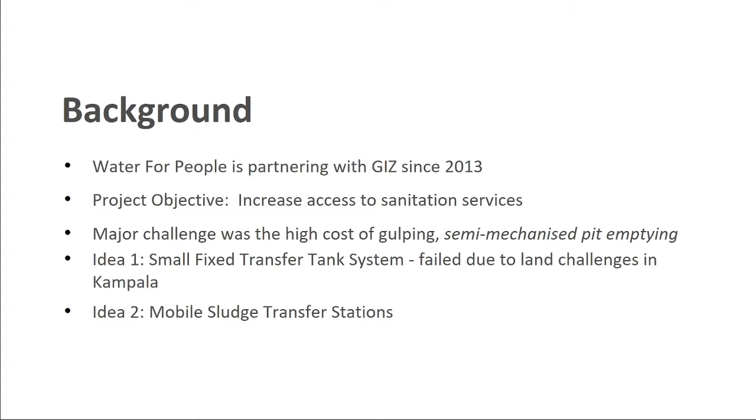So the first idea was to have a small fixed transfer tank system. Why that failed? Because land is a very big challenge in Kampala, and no community wanted fecal sludge next to them. So the second idea that we came up with was a mobile sludge transfer station. So you ideally have the capture, then it moves through the different small trucks, the gulpers, and it can move to a large cesspool truck, and then it can be taken for treatment and reuse. In between is where we fix the mobile transfer tanks. The idea was the gulpers with their drums can pour into the mobile transfer tanks, and these can then move to the emptying.

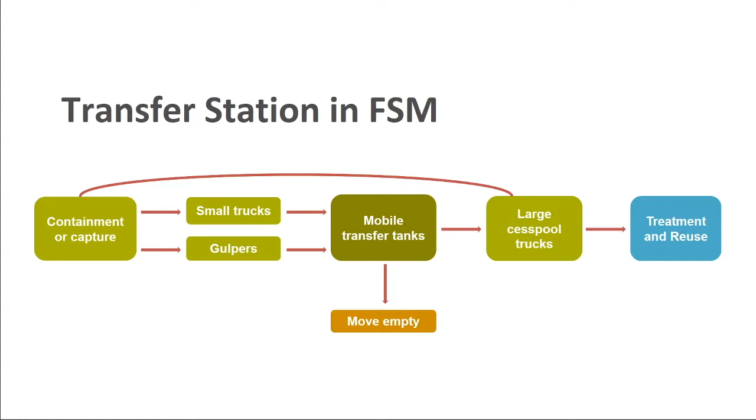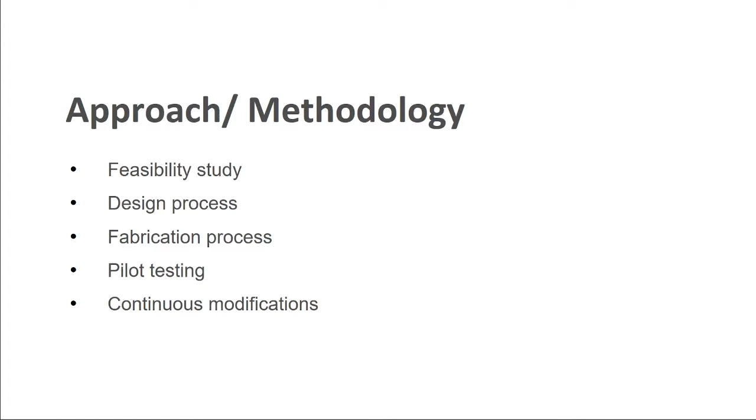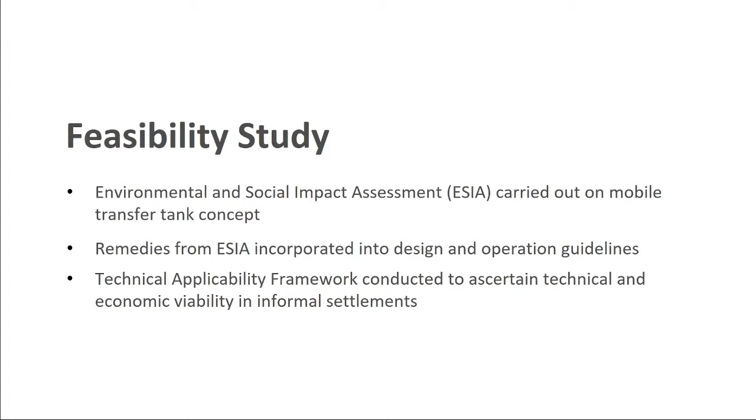So how did we approach this? A feasibility study was done, design process, fabrication process. The pilot was tested, and now we are continuing with continuous modifications from the results of the pilot. An environmental and social impact assessment was carried out on the mobile transfer tank concept, and the remedies for whatever impact came out were incorporated into the design and the operation guidelines. But also a technical applicability framework was conducted by the Appropriate Technology Center. This is a research arm of the Ministry of Water and Environment in Uganda, and it was to ascertain the technical and economic viability of this concept in informal settlements, and they approved it, so we were able to get a go-ahead.

So our partners, Kampala Capital City Authority, were able to donate 2 grounded cesspool emptier trucks. These were assessed for whether we could still use them, and these are actually what we used. They were modified into what is currently the transfer station. We designed using AutoCAD, and the first design was to accommodate the semi-mechanical gulper operators. So the loading and offloading systems for the first transfer station were all manual.

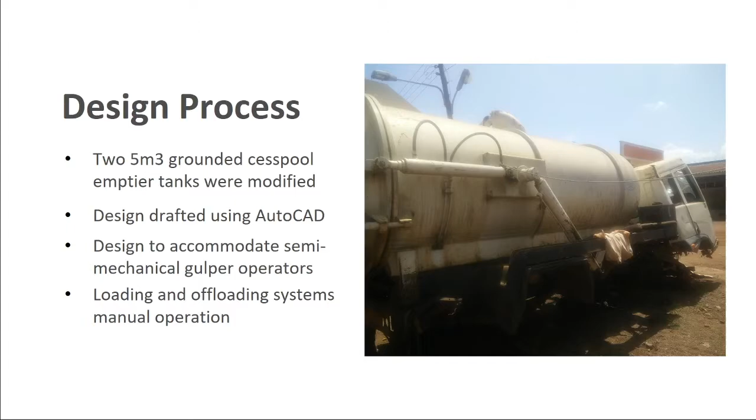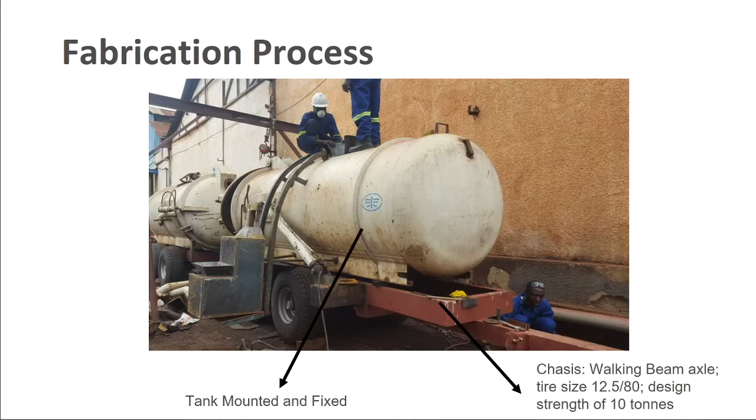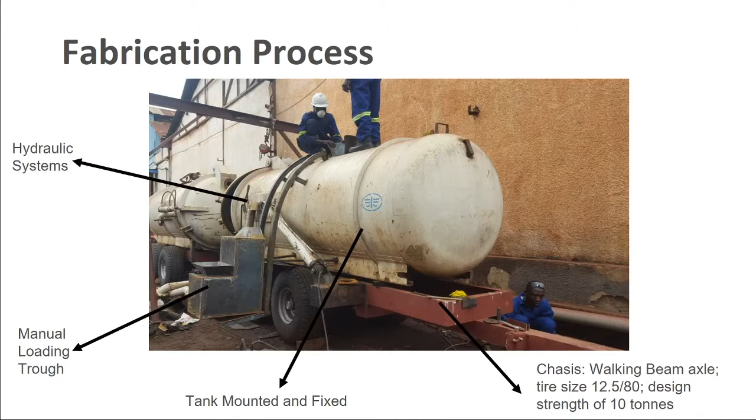So the idea is that the gulpers empty into the transfer tank, which is then hauled to the treatment plants. Prior sensitization is carried out in the communities so that the gulpers would be able to have sufficient material to be able to carry around. So before the transfer station gets to our community, the community is sensitized, and those who need their pits emptied, they're prepared and they're ready, and of course the gulpers have done their different assessments of the pit latrines.

We found that the operation costs reduced significantly per barrel from $7.5 to $5. And the transfer station is currently in operation, and the business model we're trying to build around it is so that it is managed by the Gulpers Association. Brian talked about the association that they have in Malawi, but in Uganda there's also a Gulpers Association. And the idea is that the transfer tank will be managed by them, and they can get a little bit of income from it, as well as it's accessible to most of the Gulpers.

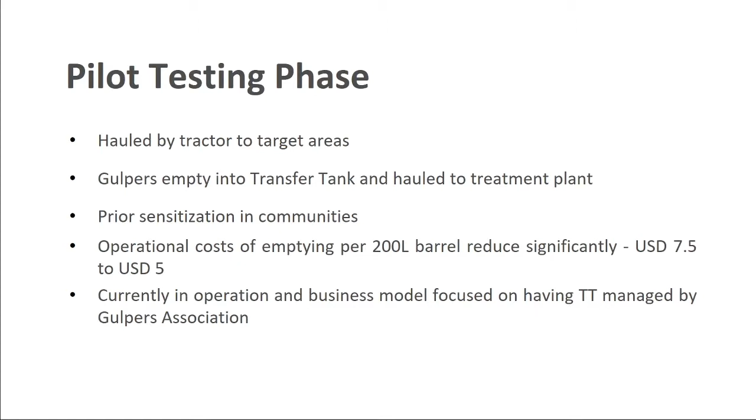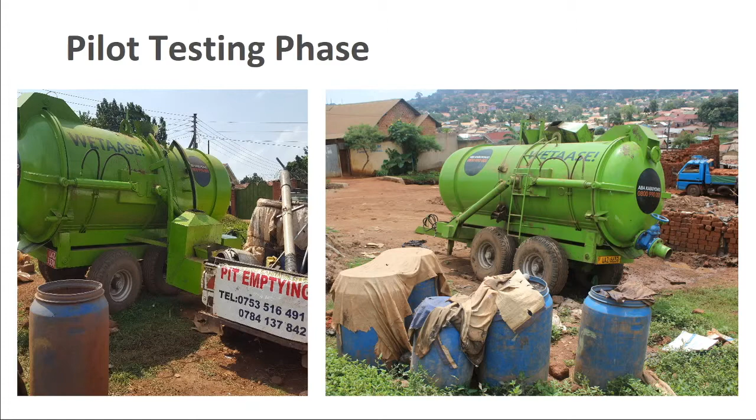So of course, it was tested in the community. So that's what happens. It's brought to the community, parked somewhere, and then the barrels are emptied into the transfer station. Yes, and then once it's full, the tractor then comes and drives it away to the treatment plant. The current business model is that the gulper operator will source out the clients who need their pit latrines emptied. He will then request for the transfer tank. So currently the transfer tank is at Water for People Uganda offices.

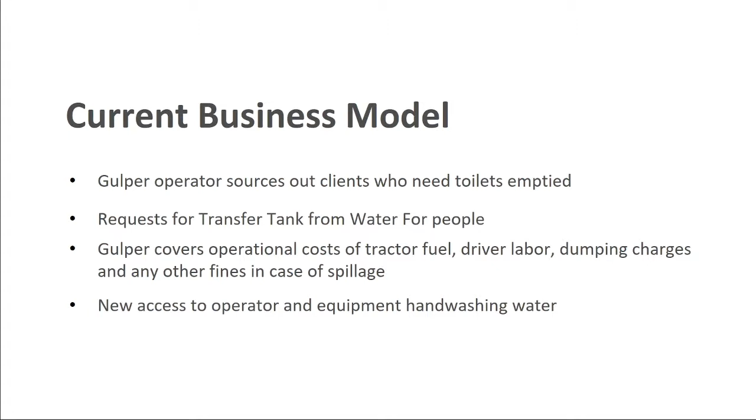And the gulper covers all the operational costs attached to the transfer tank. That is, they'll cover the fuel, they'll cover the labor for the tractor driver, but they'll also cover dumping charges and any other fines in case they're found spilling. Although we have managed to ensure that the tank itself, we've done a bit of modifications. It has a water tank to be able to avoid some of those spillages. And then what are we currently doing?

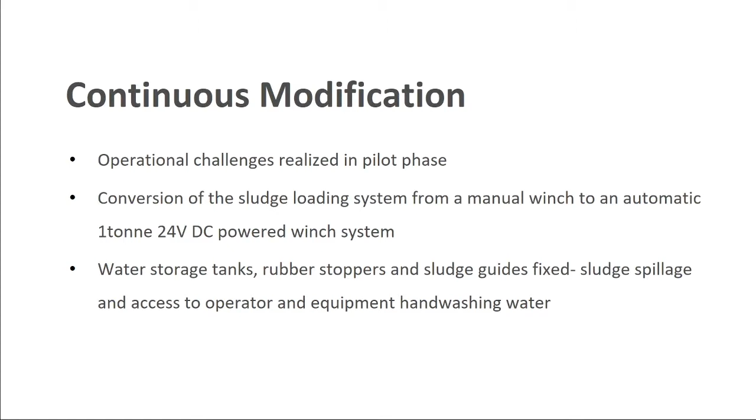Of course, the operational challenge we found in the pilot phase was nobody wants to load manually. So we have converted the sludge loading system from a manual winch to an automatic 1-ton 24-volt DC-powered winch. This helps the loading process, and it's much faster. We included a water storage tank, rubber stoppers, and sludge guides were fixed so that we avoid spillage.

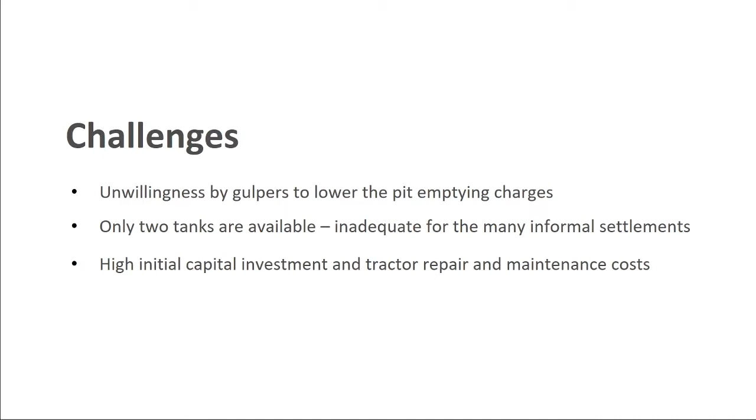Challenges: even with the transfer station in place, there's still been unwillingness by the gulpers to lower the pit emptying costs, because nobody really wants to lose out in their business. And so that has been a challenge. Of course, there are only 2 tanks available, and this is not sufficient to cover all the informal settlements. And the high initial capital investment costs for the tractor, because that is still being covered by Water for People, and that cost hasn't really been recovered yet.

So what's the way forward? We're going to definitely continue with our field tests. Every time it goes to the field, we take note of the feedback that we're given to make the adjustments. We want to increase the number of mobile sludge tanks, and at this point I invite partners to come and join us to increase the number of mobile sludge tanks, because the concept is working, and it does work. And of course, have the new business model where the transfer tank is managed by the Gulpers Association.

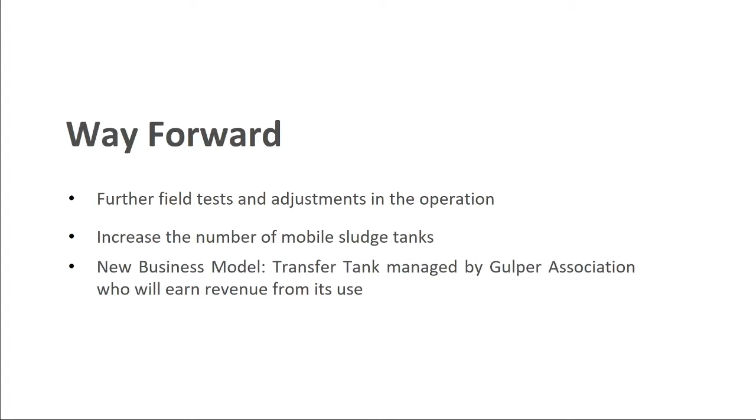Thank you so much. Thanks, Yvonne. It's very interesting to see you keep on modifying your transfer stations. Thank you. 2 questions?

Thank you very much. I would like to know if you are implementing some kind of block desludging campaign in the blocks of the ward, and in terms of some awareness campaign or some kind of incentives to the household in terms of reducing the price of the service when that kind of campaign is in place. Okay, thank you very much.

So currently what we're doing is we're working with the local leadership. As opposed to pit emptying by demand, we're encouraging the communities to do scheduled pit emptying, and this we work on in relation with the local leadership. So we say the transfer station will be in this area at this time.

These will be the gulpers who will be available, and we do this, of course, in collaboration with Kampala Capital City Authority. And then, if the gulper knows that he has very many people who are emptying, it helps to definitely reduce the cost. So we're encouraging the communities to get into a system whereby they plan when they will empty so that they can benefit from the economies of scale.

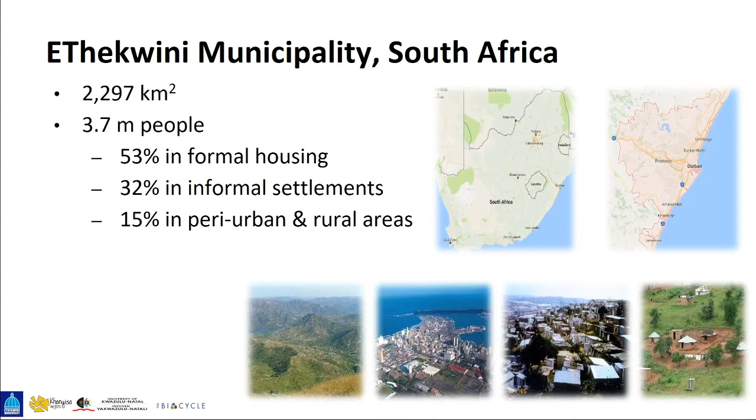So, eThekwini municipality covers an area of roughly 2,297 square kilometers with a population of 3.7 million people. And as you can see, there's an almost equal split between people living in formal dwellings and those living in informal dwellings in the rural areas and dense informal settlements within the city. So, water and sanitation. In the new political dispensation, water and sanitation was recognized as a constitutional right. And as a water services authority, we were mandated to provide these services.

In keeping with the pro-poor transformation agenda of providing services for the previously unserved, we had to look at clear, innovative solutions. The densities and the terrain of the municipality itself made it difficult for a one-size-fits-all kind of approach. So the learning by doing approach is what guided our decisions and strategy, and it is one where research follows implementation, and if something has 80% chance of working, we would implement with the possibility to fail fast and improve thereafter.

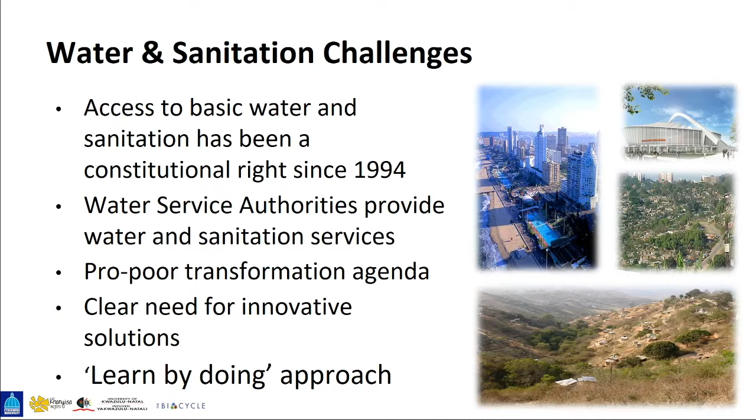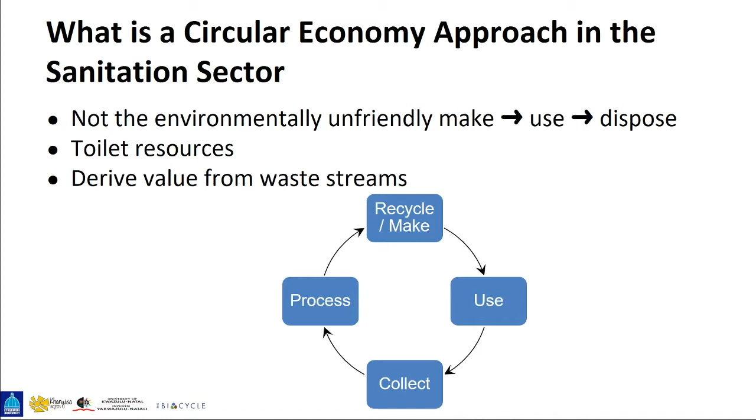So the circular economy approach, what is it? It's most certainly not the environmentally unfriendly make, use, and dispose. In the circular economy, toilet waste is seen as a resource with multiple value streams. If we look at Durban, Durban was one of the early adopters of technologies and practices that supported the circular economy. One of the most successful interventions being the Durban water recycling plant, a public-private partnership on a 20-year concession that treats wastewater and resells to industry. This partnership is still in place and generating profit.

In 2010, we had the DEWATS plant, and this is in partnership with BORDA, looking at recovering water and nutrients for agriculture. This project itself was quite a bit of time in the research phase. We're now moving into the implementation phase. In 2012, we have the LaDePa plant for processing of pit sludges, and here we generate fertilizer from the plant itself. Whilst we didn't get to market with the product itself, a lot of it was used in the community gardens.

So the 2013 VUNA research project looked at nutrient recovery from urine, and this is the subject of a project that we're currently looking at in terms of the new technologies that are out there, and that is the urine diverting flush toilet, the opportunity to now look at installing these in urban areas, collecting the urine and processing it.

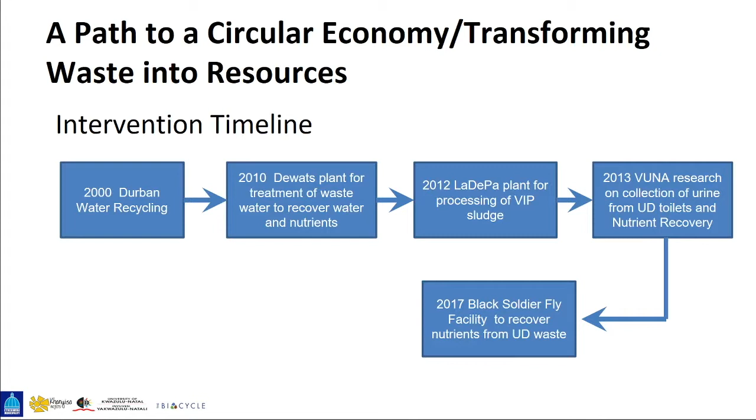The context in Durban: we have built over 80,000 urine diversion toilets, and this goes way back to 2003. The toilet itself has alternating chambers, and the contents remain in the vault for roughly 2 years before it's emptied. And the initial responsibility to empty was that of the householder.

But research has shown that in spite of the contents being in the vault for over a period of 2 years, there were pathogens still prevalent in the fecal sludge itself, posing a great risk to the householders in emptying. So there was a commitment from the municipality to provide a free emptying service. The increasing densities in the rural areas also challenged the emptying and burying on site. So we had to look at other options and consider the recycling component.

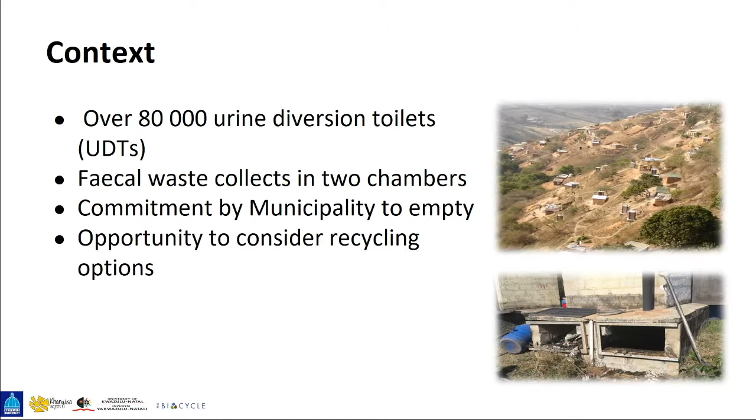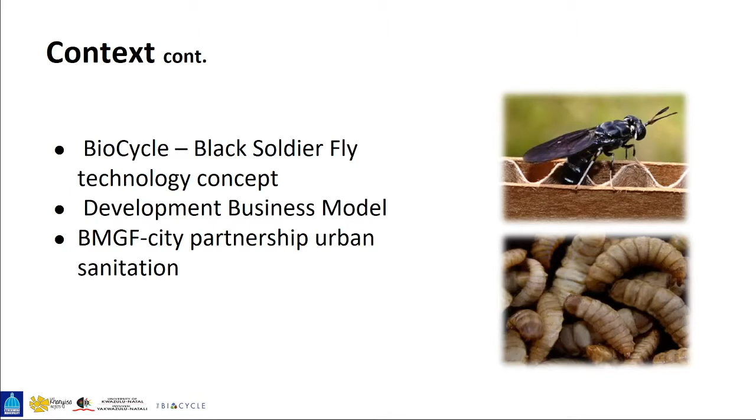So at FSM2, we were introduced to the black soldier fly concept, and that really got us excited, and we started a lot of discussions with Biocycle and the mother company, AgriProtein, and we looked at the different business processes to take the project forward. We were fortunate, and roughly around the same time, the foundation put out a call for city partnership urban sanitation services, and we jointly did a submission and were successful in starting off a pilot in Durban.

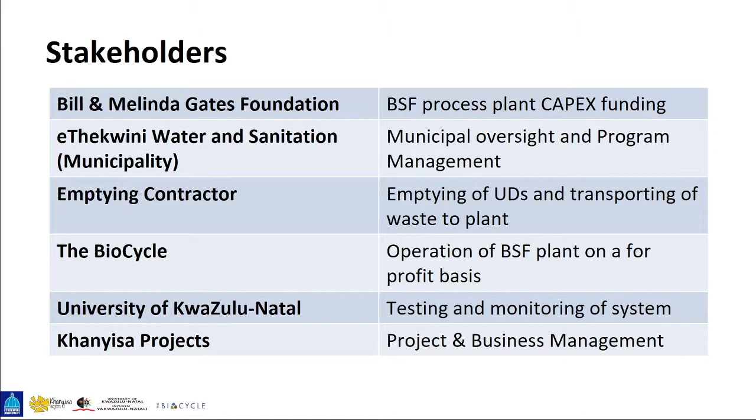So the stakeholders of the project are the Bill and Melinda Gates Foundation, providing the CapEx for building the plant; the municipality for the oversight and program management and providing some of the funding as well; the emptying contractor, emptying the urine diversion toilets and transporting the waste to the plant; Biocycle, the private operator operating the plant on a for-profit basis; University of KwaZulu-Natal for testing and monitoring; and Khanyisa Projects for project and business management.

So looking at the flow of the process itself, I'm not going to go into great detail, but suffice to say that the UD waste was brought in by the private contractor. At the weighbridge, the contents were brought in, and that determined how much we paid the operator in terms of the gate fee. The two resource streams were the larvae and the residue, with the outputs being oil and animal feed, and from the residue, biochar.

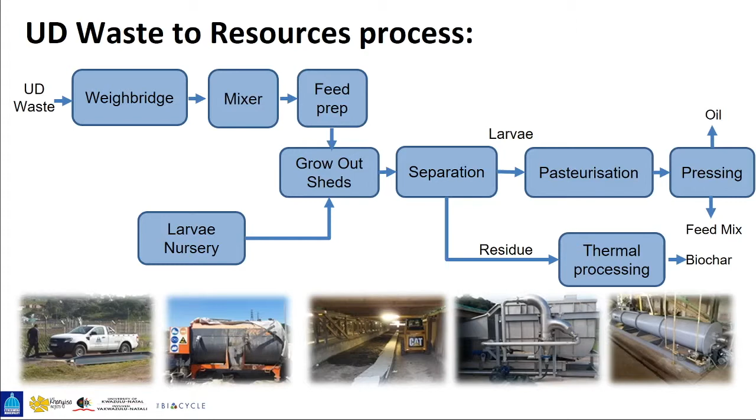So the two partnership contracts along the value chain: in the emptying and the transport, this was a tender-based contract using local entrepreneurs, whilst the treatment and taking products to market was through a service level agreement with the operator.

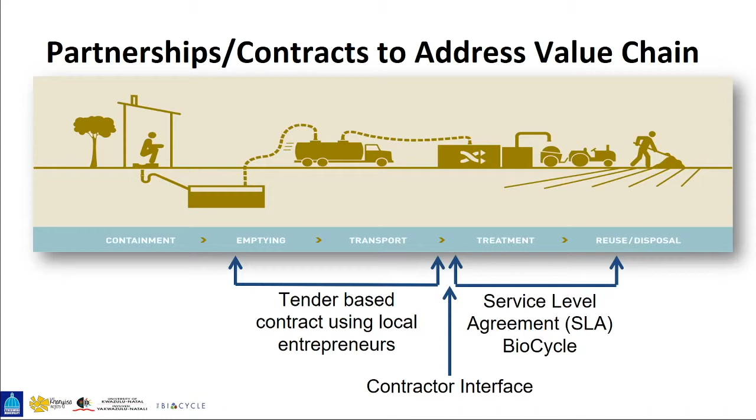For the tender-based contract, the contract specifications spelled out the scope of work with a lot of emphasis on health, safety, and environmental compliance, the mentoring of both the contractor and the subcontractors on the project, quality control, and GIS as a management tool to program work packages and record information as to when the vaults were emptied and the general status of the toilets.

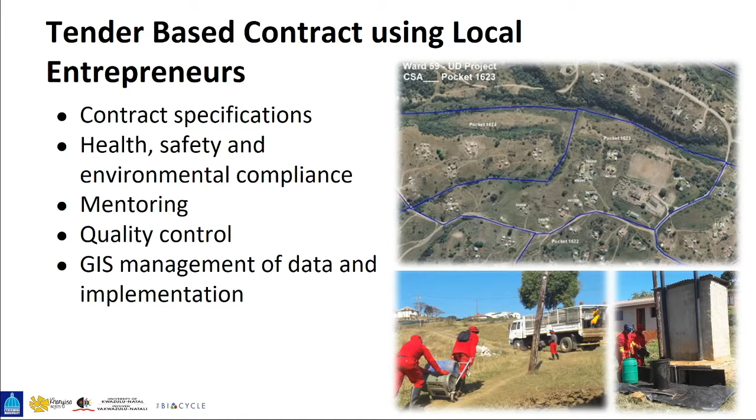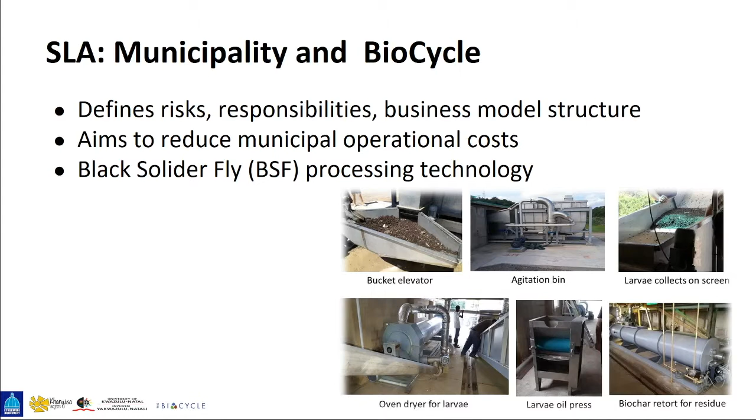The service level agreement between the municipality and the operator defined the risk, responsibilities, and the business model structure, with the aim of really getting the product to market to ultimately offset our operational costs as well. The pictures that you see there show the initial processing technology. That's when we started up in the early days, and we were treating roughly 3 tons a day.

The business model, as I mentioned: the CapEx is provided by the foundation, and the municipality then provided a variable gate fee for the processing of the waste. The gate fee itself was more cost recovery for the operator in terms of recovering operating costs. So the incentive was really to get the product to market and generate profit, and ultimately the municipality would share in the profit.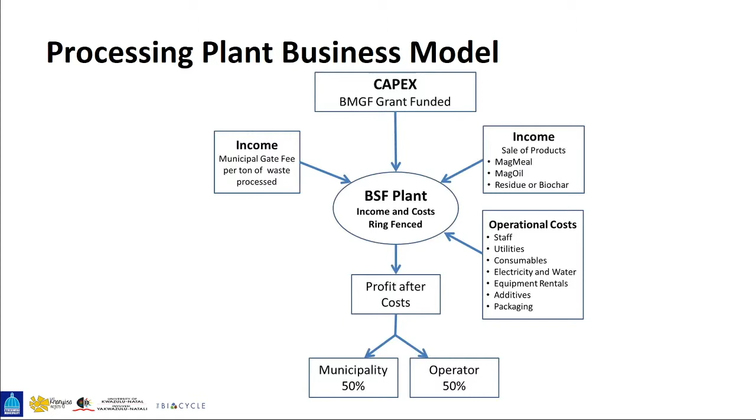The result is that to date we have emptied over 50,000 urine diversion toilets. The processing plant's early trial stage started roughly around 2015, 2016, and it was really just testing, but it became operational with the new processes in 2017.

So the iterative testing of processing elements is still ongoing, and we made changes to the plant itself in terms of the screenings and the detritus, because a lot of the trash and grit hampered the process treatment. We didn't factor in the impact of the weather conditions on the grow-out sheds. In winter, the cold weather really slowed down the larvae growth.

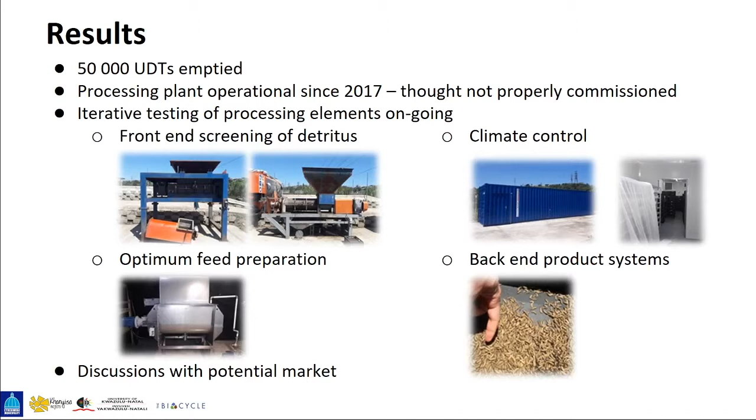And equally, you had to look at what was the optimum feed preparation in terms of looking at the different mixed fecal sludge and food waste, or primary sludge and pit sludges. So we really didn't have a product to really take to market. And the further challenges were really the different timelines of the private sector and the municipality, which meant that we couldn't make decisions very quickly. We were also held back by the procurement processes from the municipal side. The private sector turnaround time is much quicker.

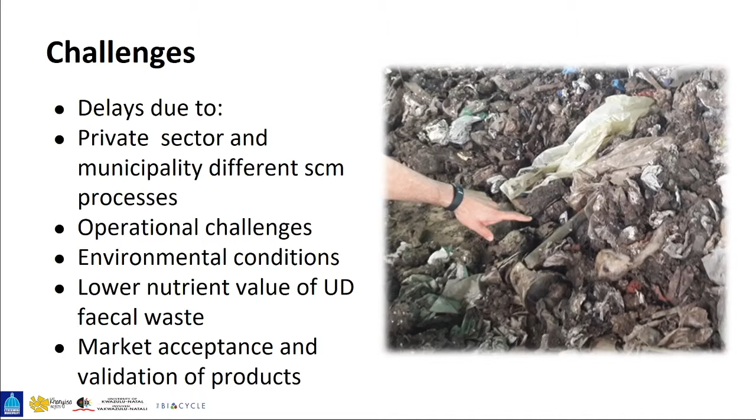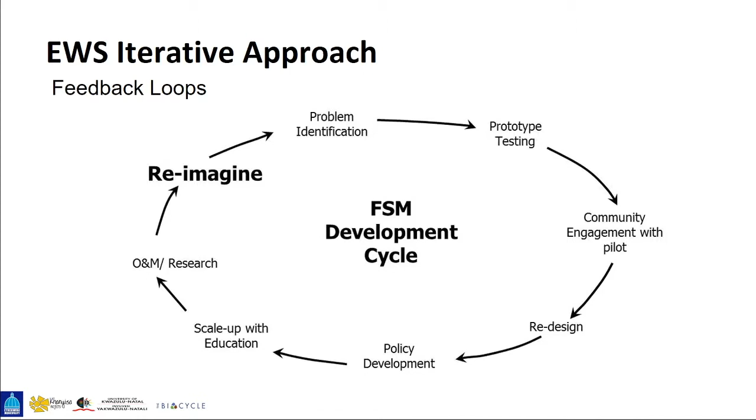The operational challenges that I mentioned are the high trash content that needs screening, the environmental conditions being the weather, the low nutrient value of the urine diversion contents itself, the fecal waste, and the market acceptance and validation of products. So the FSM development cycle talks to the approach that we take, one of continuous improvement, and as mentioned, we have research following the implementation. So we get real-time data, and we are able to then make these changes earlier on. So they follow the fail-fast strategy.

The lessons that we've learned: the regulatory framework and legislation play a critical role in creating the right environment and conditions to develop the circular economy amongst business and the private sector. Incentives and penalties and checks and performance. I think there's great opportunity to also ensure at the social level that we have some sort of incentives for householders to start separating the waste itself, to reduce a lot of our operational costs.

Blended funding, in the case of this project, where the foundation provided the funds for the initial capex and the operator met the operational cost, together with us having to pay a gate fee, ensured that there was a vested interest to start getting the project to generate profit. So whilst there's a valid business case for the circular economy, it's important to note that the private sector can only sustain services in the public space if their invested efforts are geared towards cost recovery or profit. And also it's important to engage with the markets early so we understand the market demands and needs.

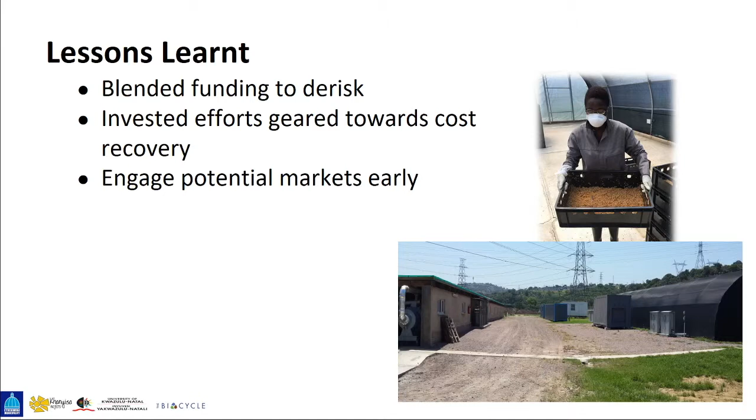We must also look at how we remove bureaucratic barriers and create an open space for innovation in which research and business can contribute. In adopting a stepwise approach, it must follow a trial and error strategy, and we must also be willing to take risks. And finally, we need to be patient and perseverant. The return on investments and functional partnerships is not created overnight. It needs long-term commitment and vision to make the circular economy successful.

In conclusion, I'd just like to add that fecal sludge management designed for resource recovery is an area of rapid technological innovation. Municipalities and business have an opportunity to start seeing sanitation as a medium of valuable resources and fully embrace technologies and practices that support the circular economy, which also offers added economic benefits in creating jobs and even new business sectors in domestic markets.